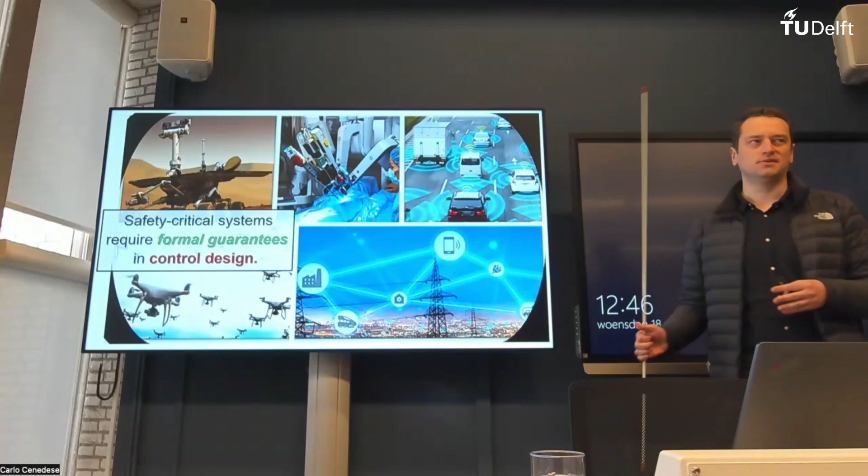The motivation, I'll try to cut it short since we're a little short on time. Basically, we need safety critical control because technological developments lead us to marvelous engineering systems that now operate in the presence of other human beings and other agents. We have to make sure some properties of the system are limited, such as the distance between cars. I do have an example we'll go through. The thing required for safety critical systems, to differentiate from classical control, is that we need formal guarantees, so we shouldn't do it in a heuristic way, or by trial and error.

What we need is to design a controller, and before implementing it, have certain guarantees. This is the content of my talk. I'll talk a little about the foundations of control barrier functions, why we actually use them, why they're nice and easy, and then how we can certify certain functions as control barrier functions — this will basically be backup constructions. Then how we can robustify them. This is a model-based approach, so the model and the real plant don't really match. How can we improve the resilience? I'm going to briefly talk about input-to-state safety in that sense. Throughout the talk I will use a safe car-following example.

So we talk about safety and guaranteeing safety. Now we need to define what it is — this definition will carry through to the end of the talk. We have a system running in continuous time, a set of initial conditions, and some sets that I don't want to be in. I'll use phi throughout the talk to define the solution of this system given the initial condition. Safety basically means: anywhere I start in the initial set, if throughout all the trajectories I never hit the unsafe set, then I am safe. But this safety definition, as relaxed as it is, doesn't give a lot of constructive ways to design the controller.

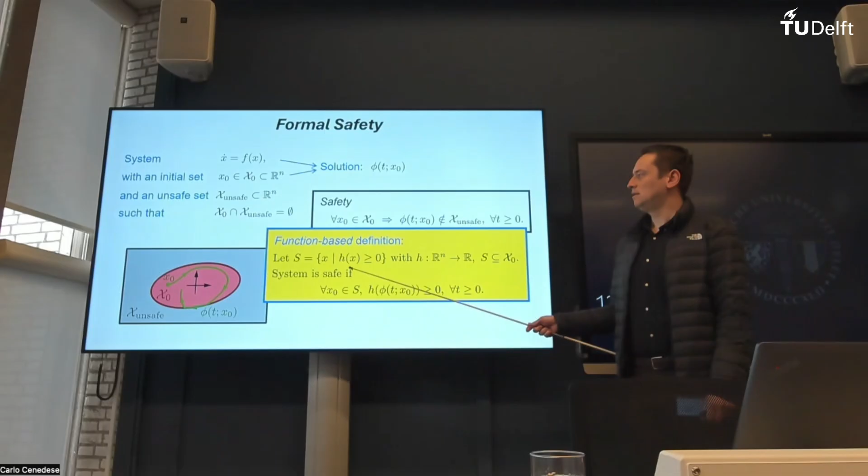This is why we actually prefer a function-based definition. It's slightly more restrictive, but we are trying to find a way to quantify safety. If I can find a set that is the zero superlevel set of this function, and this set is a subset of the initial condition, and for every initial condition, if I roll out these trajectories the function is always positive, then I am safe.

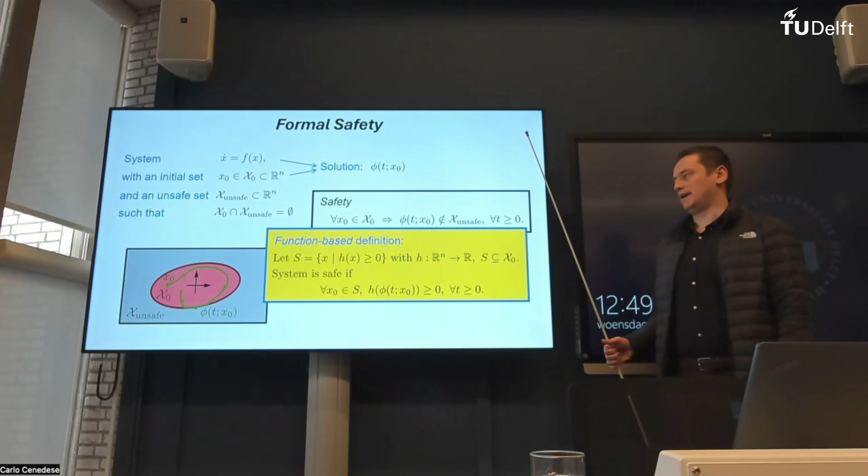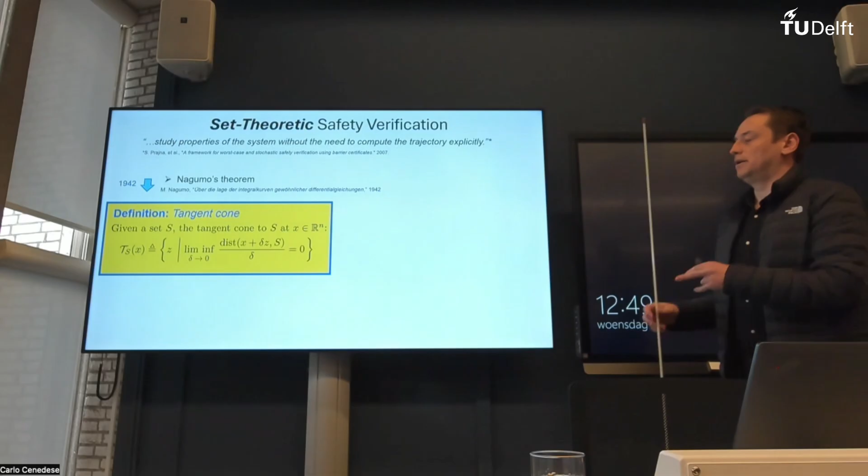So this will be the safety definition that I will rely on. How do we make sure safety is actually satisfied before implementing into a system and making a lot of experiments and heuristic or trial and error ways? It's through this set theoretic safety verification.

This basically one sentence summarizes it very well. So basically we are trying to find safety as a property of a system without really having to calculate all these trajectories for every possible initial condition. And the developments for this line of work go all the way back to Nagumo's theorem around the Second World War, where all this science and progress typically peaks throughout the world, unfortunately. But Nagumo basically found a very tight way to identify safety for a nonlinear system.

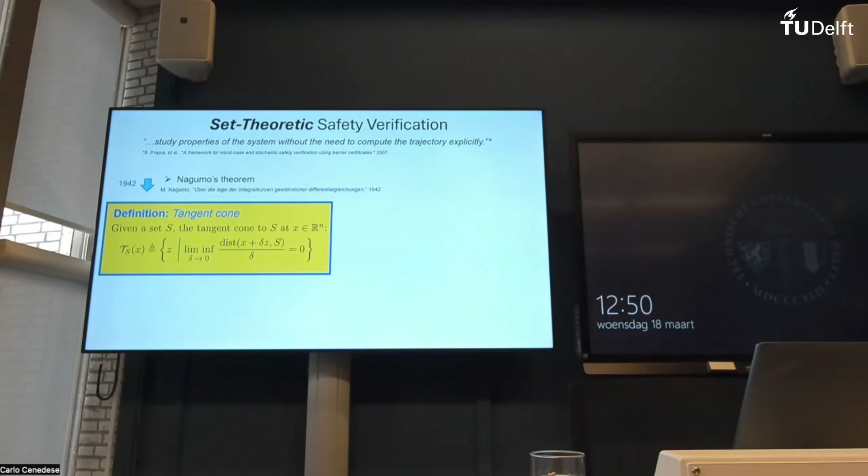It relies on this idea of tangent cones, or somehow I think some people call it contingent cones. The tangent cones are basically, at a point, the set of directions where if I go infinitesimally in that direction, I will still be in that same set. So this is basically what it says.

It's a fancy definition, but I'm not going to use this definition at all. Nagumo basically binds this definition to safety. And what I mean by tightness is he actually uses if and only if to bind this, so it goes both ways, which is pretty important. If my model at every point in this set falls into the tangent cone, then I do have safety.

This function that I use to define the set, if it's Lipschitz or smooth, then this tangent cone can be seen as a subset of this condition that I can use to calculate another set. This is basically the generalized gradient of this set. And for the smooth case, I can use the gradients to calculate the half space. But this is actually a kind of necessary condition, not a sufficient condition to give me the tangent cone.

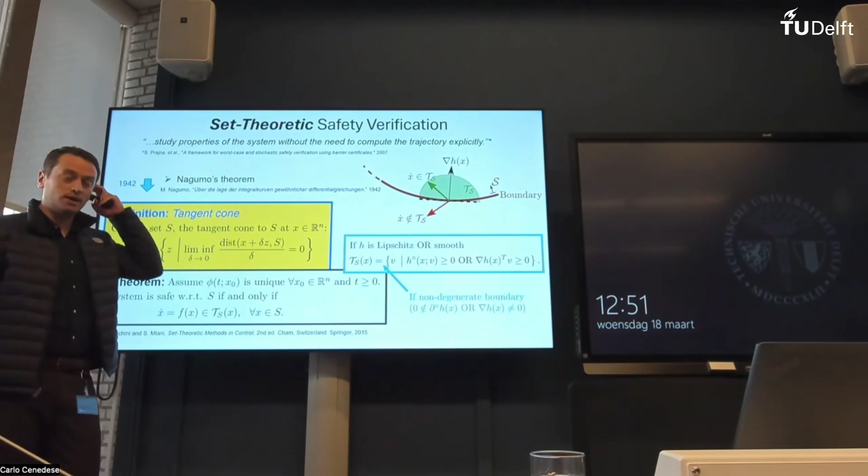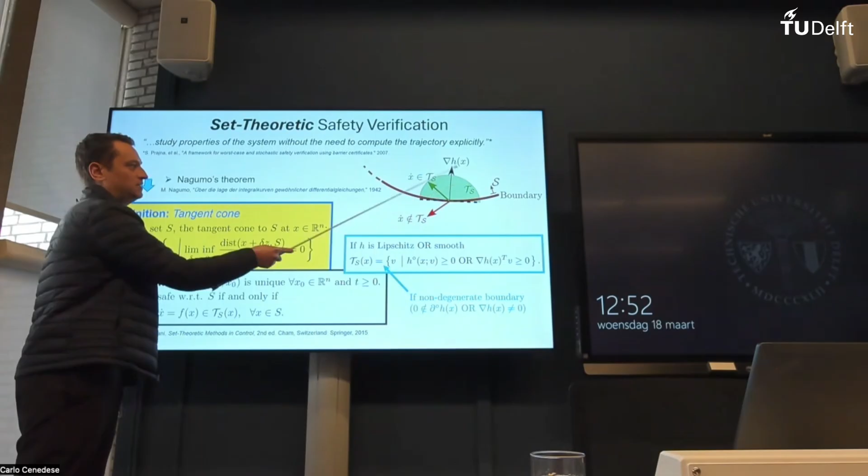If I have some non-degenerate boundary condition basically everywhere on the boundary, that means if my function is smooth and its gradient doesn't really disappear anywhere, or in the generalized case, if zero is not part of the set, then this becomes equivalent. So this kind of half space now becomes my tangent cone, and I can use this to basically define safety critical controllers. This is basically kind of what is lying underneath.

From here, we kind of jump to control barrier functions, because the tangent cone condition only gives us something to work on at the boundary, but we don't really like this because we are trying to design a controller. And if a condition tells you nothing until you hit a boundary, that's not very practical. So what you want is a condition that can also be extended toward the set itself, so maybe gradually you can approach the boundary and stop somewhere on it.

And this is where control barrier functions come into the picture. It's kind of inspired by Lyapunov functions, where we try to find this positive definite function. And by upper limiting the time progress of that positive definite function, we make sure trajectories converge all the way exponentially to the origin.

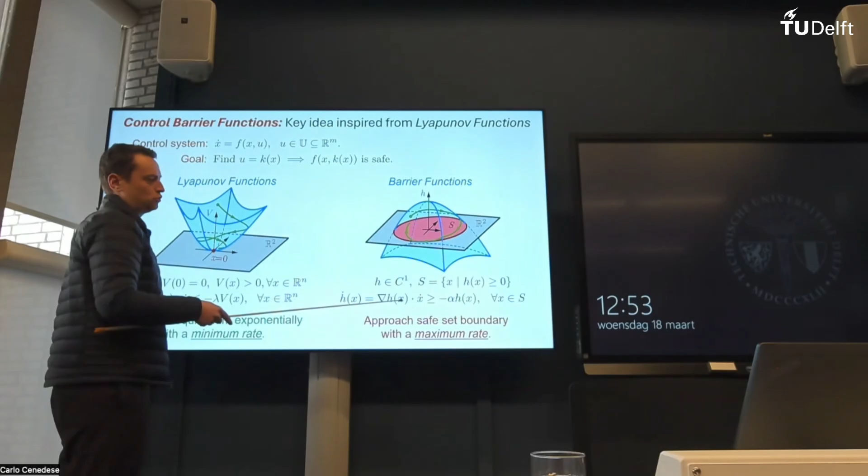Similarly, in the barrier function, you can think of that function kind of flipped and pulled a little bit above so that you create the set. Now, instead of upper bounding, you lower bound the time derivative of this function along all the trajectories, so that you can approach the set boundary, but exactly on the boundary this becomes zero, so you cannot leave. This is a very basic condition I can use to design the controller.

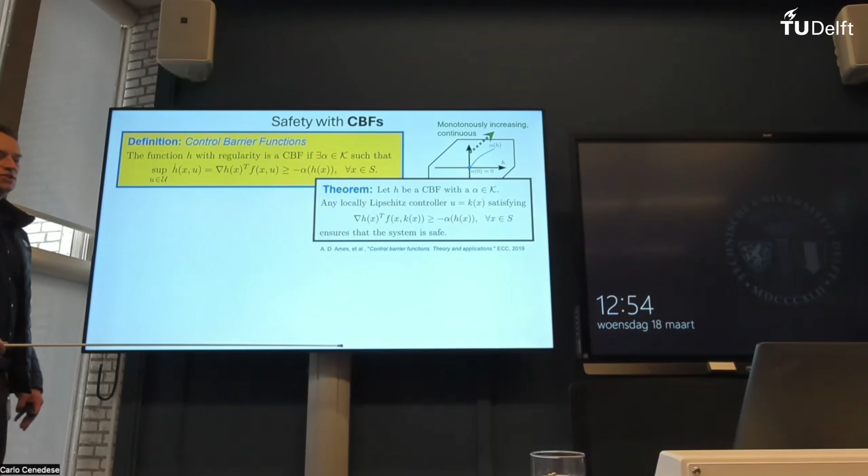This is basically the theoretical progress of this method. So we do find a way to define what a function is, whether a control barrier function or not. It relies on finding a class kappa function that can lower bound the time derivative of this function along the trajectory. A class kappa function is just basically a generalized version of a linear function. It's continuous, its argument is zero, it is zero as well, and it is monotonically increasing.

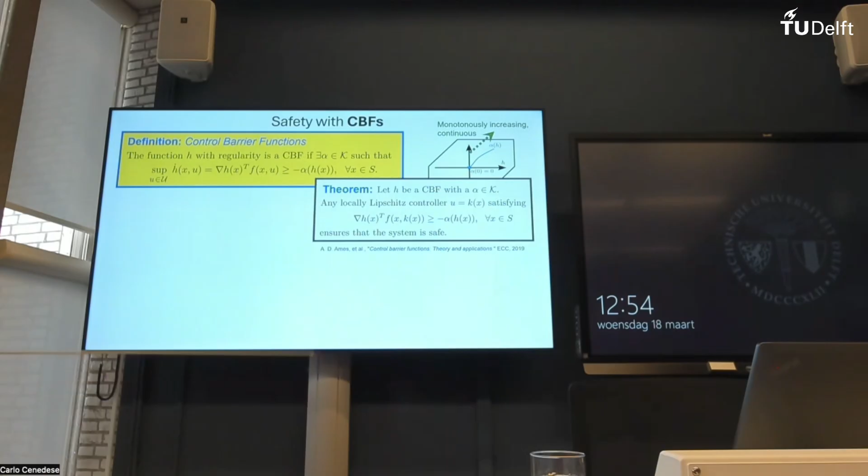And the theorem tells me that if there is a control barrier function for this state, for this system, then any locally Lipschitz continuous controller that satisfies this condition is going to keep me safe.

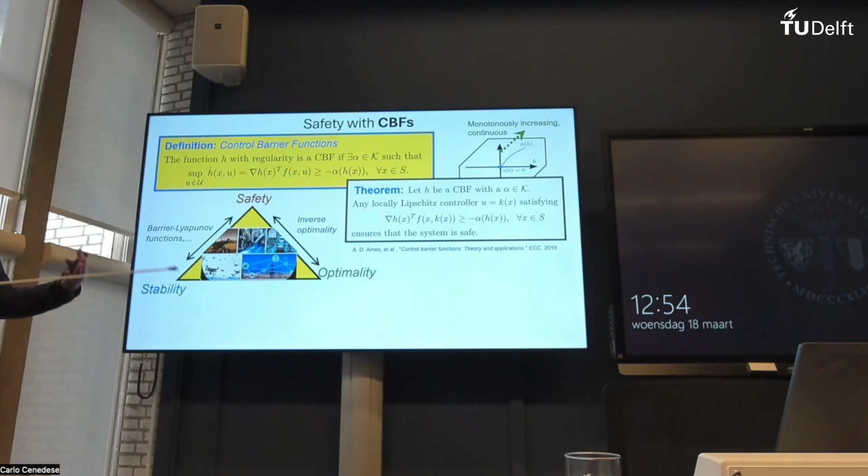So this basically deals with the safety part of this problem, but I think in modern engineering systems, we actually want to deal with all the other things as well, such as stability and optimality.

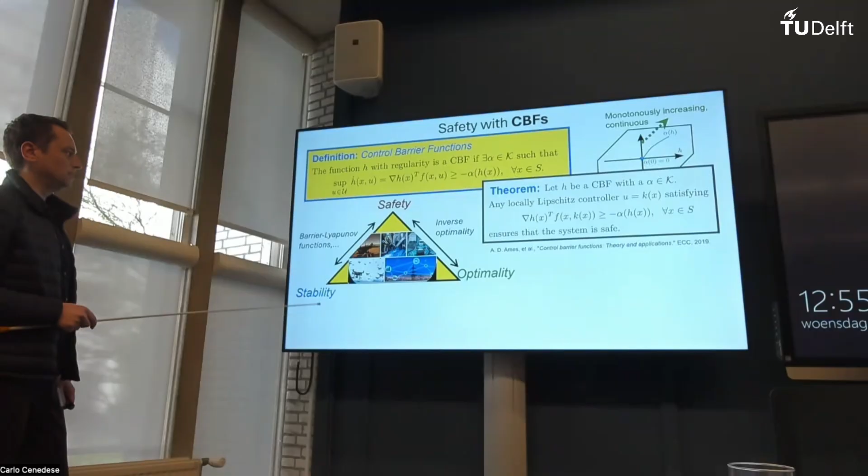Recently, there are some works threading the difference between these three edges of this triangle, such as the construction of Barrier-Lyapunov functions. And recently, Miroslav Krstić had a paper about inverse optimality, trying to find a way to get safety but also be more optimal.

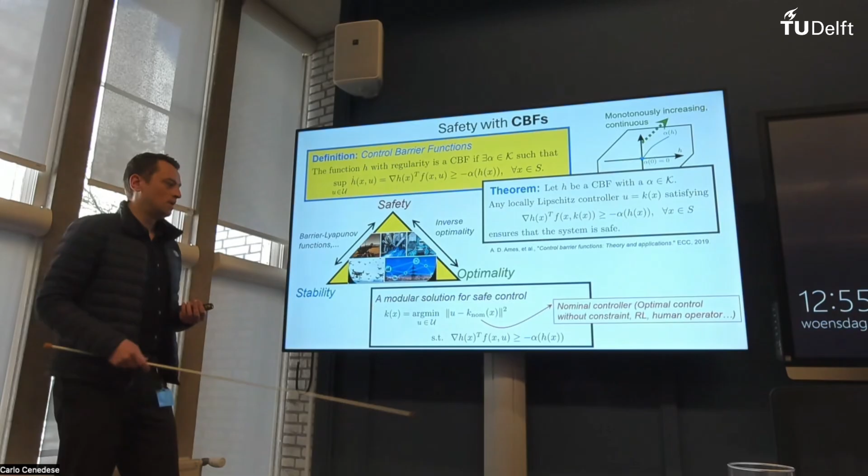But in this talk, I will talk about one particular type of controller that I can design using control barrier functions. It's called a safety filter because it's modular, very simple, and popular for its flexibility. Basically, it takes whatever controller you have—it can be another optimal controller that doesn't consider constraints, it can be RL, or it can even be a human operator.

I will show you some results based on that. Basically, what you need to make sure is that the outcome of this controller satisfies the control barrier function condition.

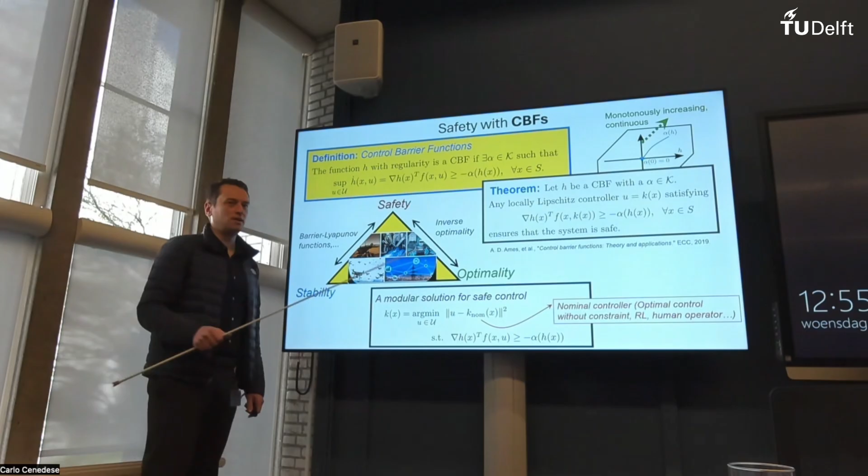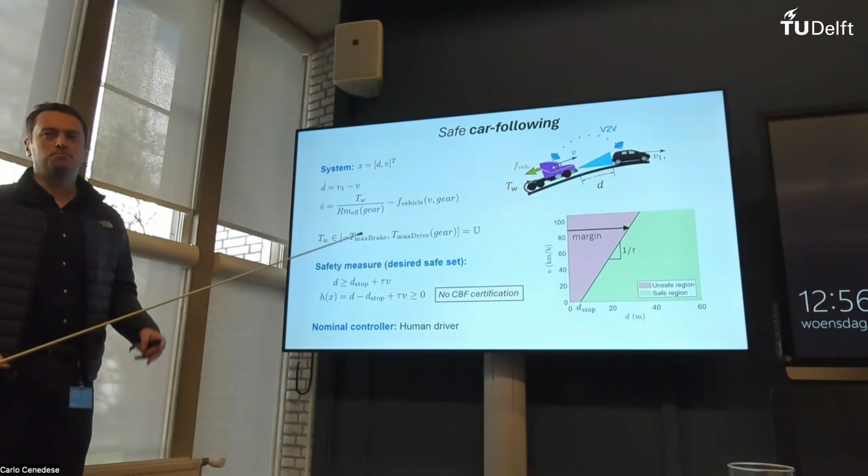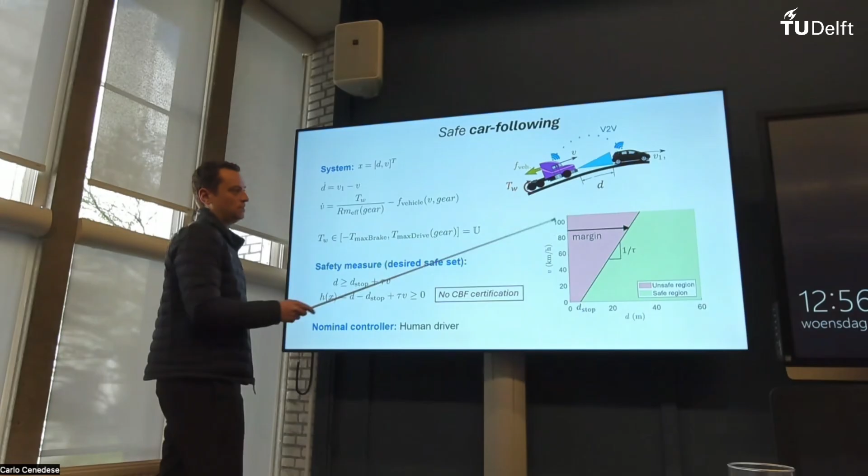As I said, I will use the car as the example because it's very intuitive and simple. I'm going to design a controller to control the gas and brake pedal for this car based on the information I'm receiving about the other vehicle—the distance and speeds are here. Basically, I just don't want to hit the other car.

I still want to add some certain margin to my safety measure. There are some practical reasons, not really that important. But basically, the idea is I want to always be in the green side of this state space, and this is obviously always going to be positive for the headway distance anyway.

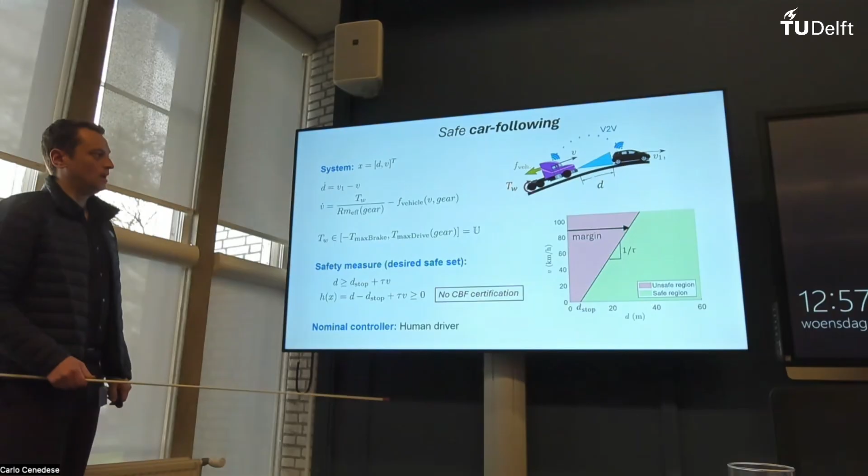The trick here is, based on this construction, I do have a certain function, but for now I'm not checking whether it's a control barrier function or not. Let's see what happens. The nominal controller I'm going to take as a human driver. So again, I'm not dealing with the optimality and stability of things, but focusing on the safety. Let's see.

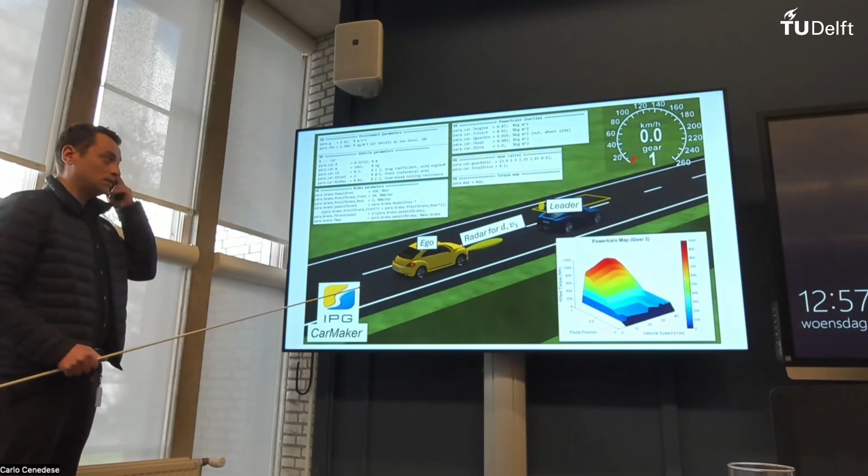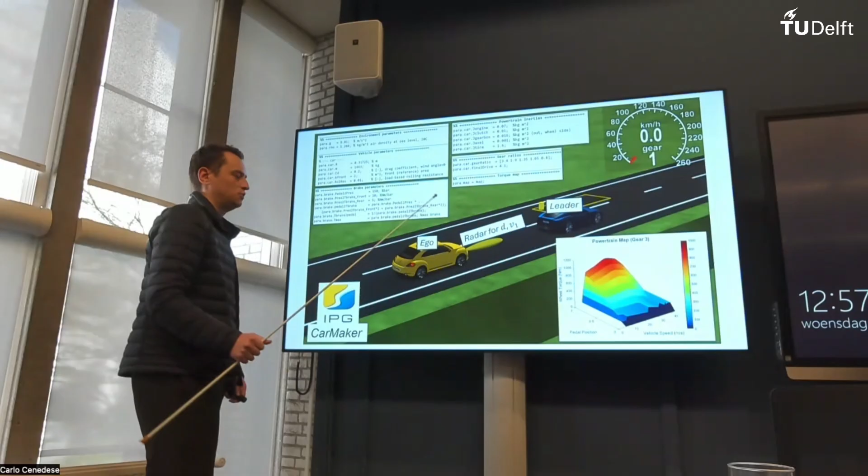For initial results, I used a high-fidelity simulator called CarMaker. It's pretty nice—you can get all the parameters for your car so you can get a precise model. You kind of need to hack the car a little bit by trying to get the gear maps and the brake maps, etc. But in the end, it is doable, and this is what I did.

So first, I'm going to give you the results for the human driver. There's no safety filter here at all. This guy is just not really minding his business, not paying too much attention to the road. This is a CarMaker model—I don't really know what's underneath running.

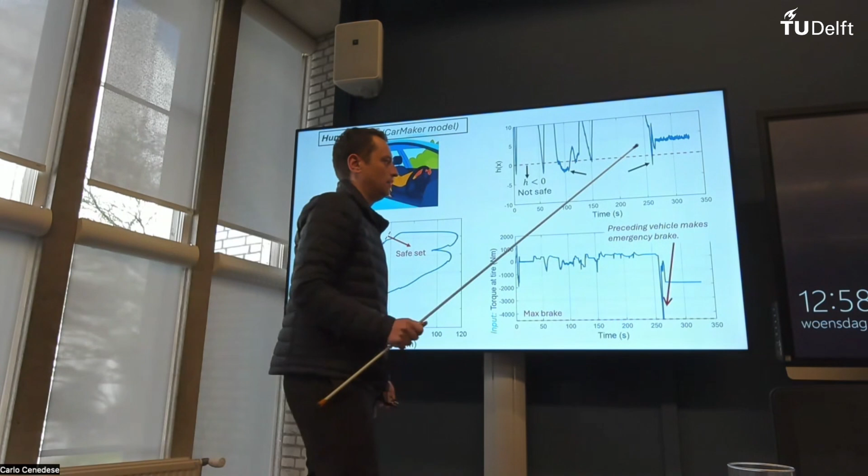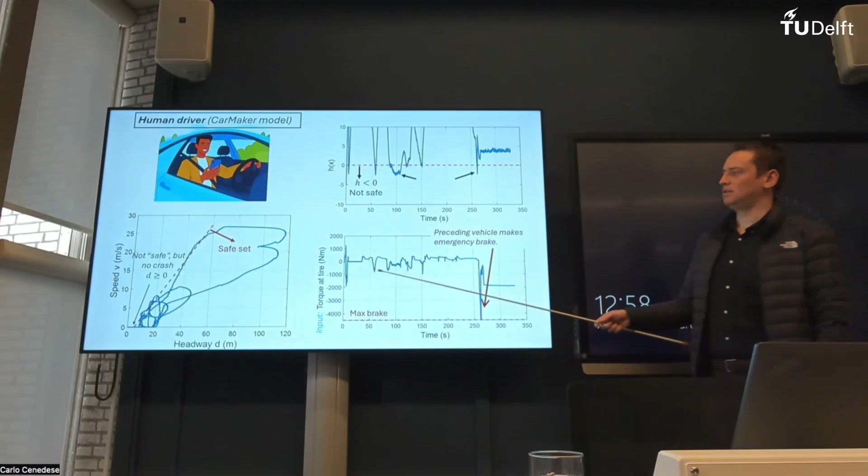As you can see, there are some instances where the safety is violated—it is the safety the way that I define it. It's important because it actually never hits the other car; the headway never becomes less than zero. But that's not important enough—we are after some formal guarantees that this function will never be negative.

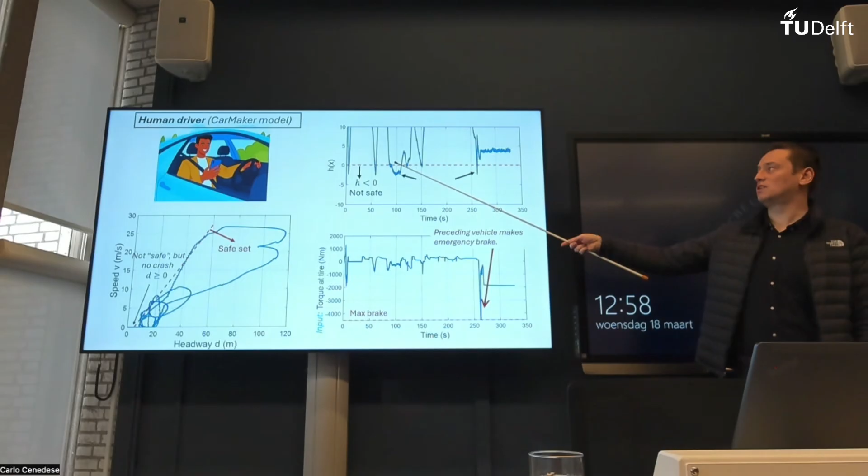If we put the safety filter on top of it, then we actually get it. It's pretty neat. And this is another very important plot that I want to show you.

This is basically whatever my controller calculates. This is important because so far I haven't talked about this maximum brake. As you can see, it is kind of going within the maximum until maximum brake anyway, so it's not a problem for now. I got the safety, I got the maximum brake here, and this controller runs within the input boundaries anyway.

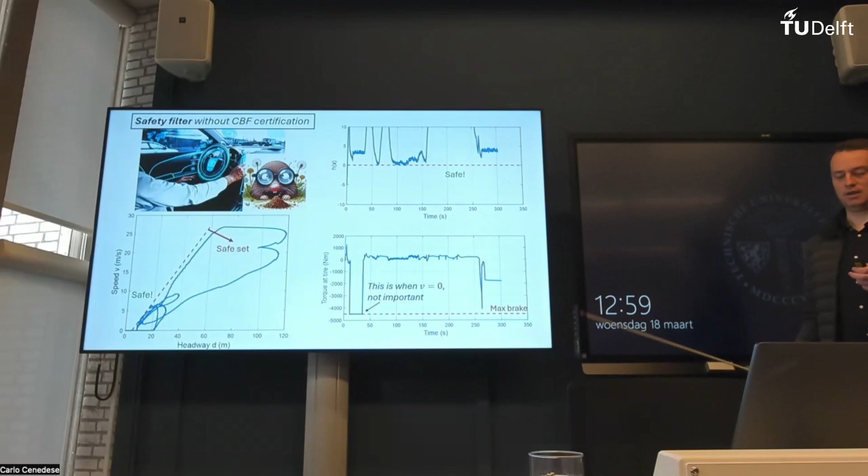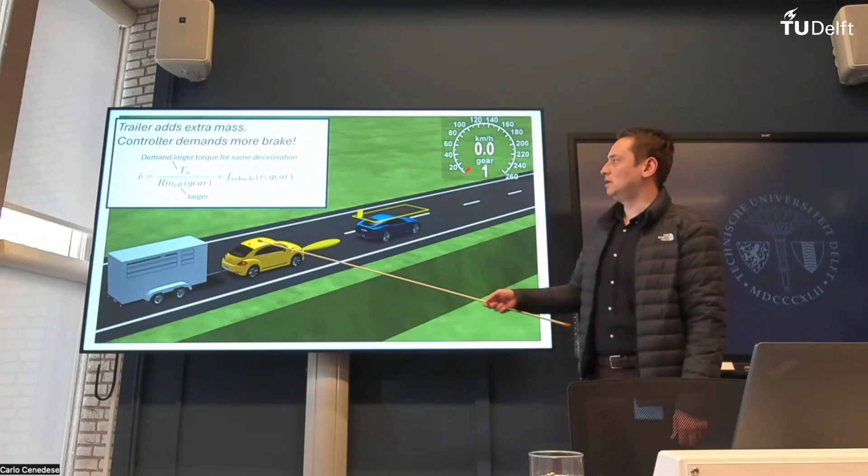But then what if we actually try to push this controller a little bit more? The easiest way for me was to add this trailer, because if your controller demands a similar deceleration, now you need a larger braking torque to realize that because of the increased mass. The idea is pretty simple—if you do that, you're going to see that mostly you are still fine.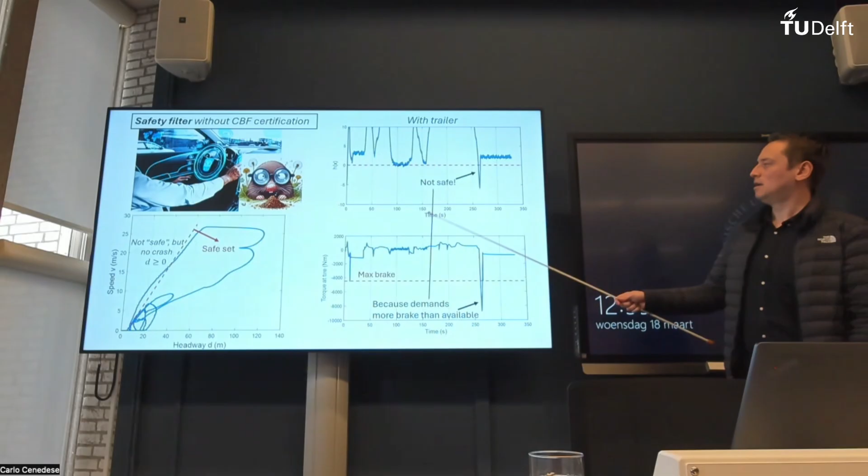But towards the end, basically, this was a certain speed profile where the leader is making a huge brake towards the end. You see that you're no longer safe just because the controller demands more than what your car gives. It is because this function doesn't have a certification.

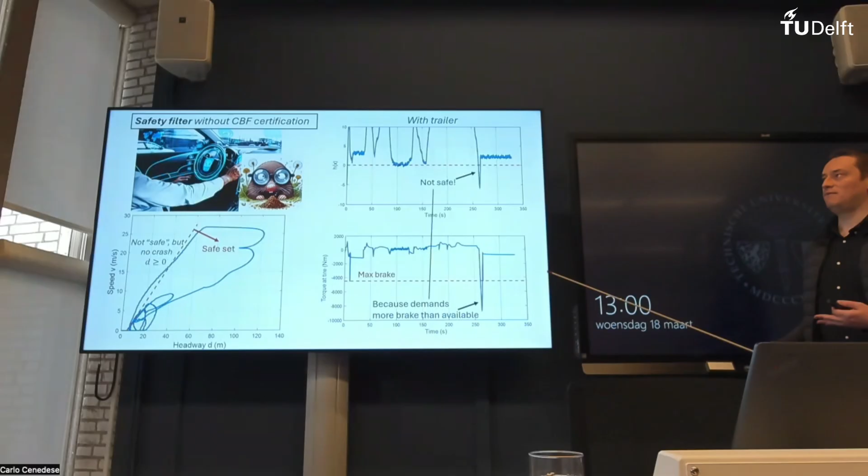And this is pretty much the Achilles heel of the whole idea of control barrier functions. The main criticism is how can we make sure that, well, if you know a function that is a control barrier function, it's pretty easy—you just construct this control.

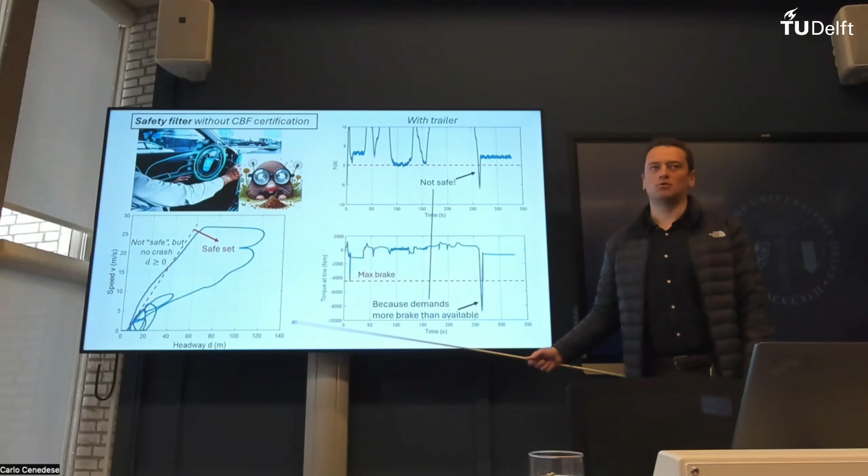But how can you actually make sure that a function is a control barrier function? This goes back to the discussion of control invariance, as I'm sure some of you at least know. This type of discussion for the MPC, what I'm talking about is recursive feasibility, basically, right? Control invariance set research goes way back, I would say 30, 40, 50 years.

The idea here is now you have a control—I want some guarantee about the feasibility, whether this set can actually be made safe within what is given to me. So if I can get this guarantee of control invariance, then I may find a way to construct a control barrier function. So we are kind of taking one step backward, getting some guarantees of the control invariance set or constructing this control invariant set.

As I said, it's very popular, a very common problem. People are trying to solve this problem using methods that are mostly numerical, I would say, like backward set pruning. Basically, you start with a set and check its boundaries. And if a point in the boundary doesn't really give you safety, then you kind of get off that point and get another set. It's a very iterative way.

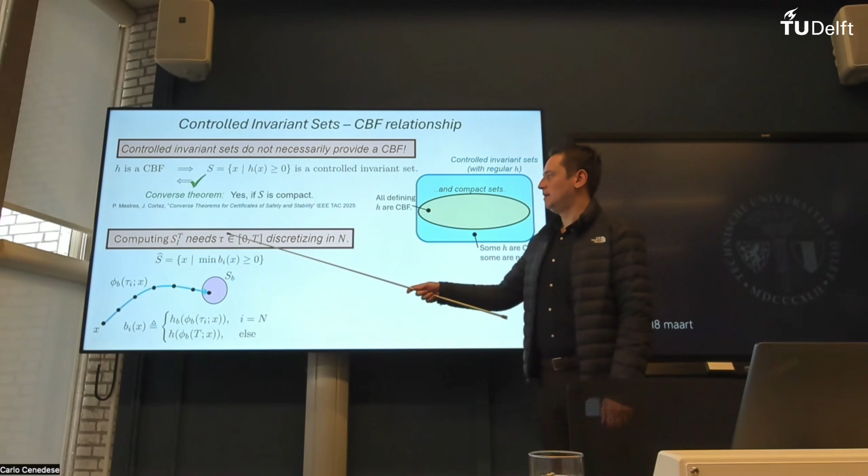Another problem with the backup set is the continuity of time. We need to discretize it, and in the implementation, this is what we did basically. The whole idea at the end of the day is we can merge these two things together.

We come up with a way to show that using the backup trajectories, you can design a control barrier function. So now we have a way to guarantee the feasibility of the safety filter as well. And if we implement this to the system, we got the premise: we do have the safety, and the controller doesn't need to violate to get the safety.

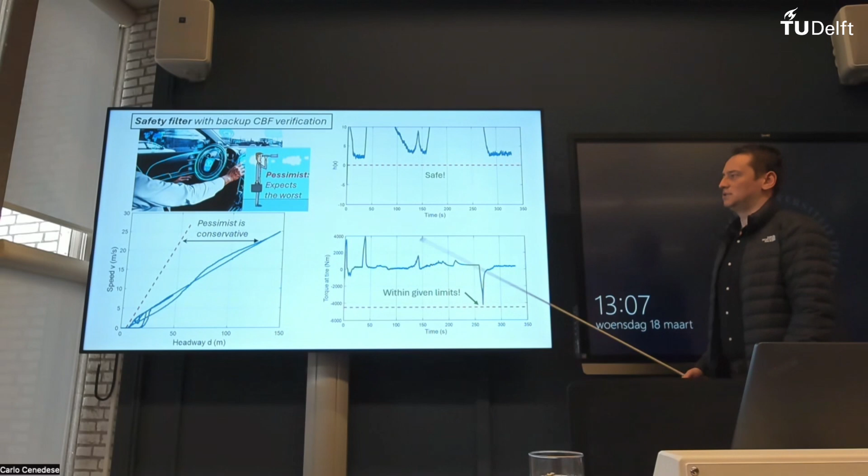But the problem is now you are rolling out certain trajectories in the simulation, and you have other agents in your system. You have to have an idea about what the other people or agents are going to do, at least within some certain window. If you always expect the worst from them, you will get a very conservative result. If you exactly know what they're going to do, then you get a really good result, but how can you know that?

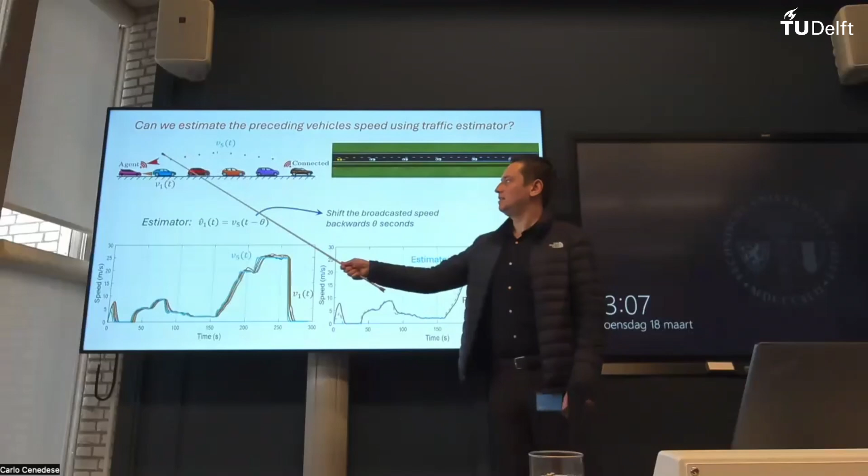This brings into question whether we can actually have a nice estimate of what this car in front of me is going to do within like 5-6 seconds. There are traffic models that give me such estimates, and I believe the simplest and most intuitive one is this one. It relies on connectivity, which is becoming another hot topic actually.

So what is going on here is if we have some certain way to get the GPS data of the first car, then we can shift it a little bit in time to estimate what the blue car is going to do. So if we get a brake for the first car, then this brake actually progresses all the way to the blue car in time.

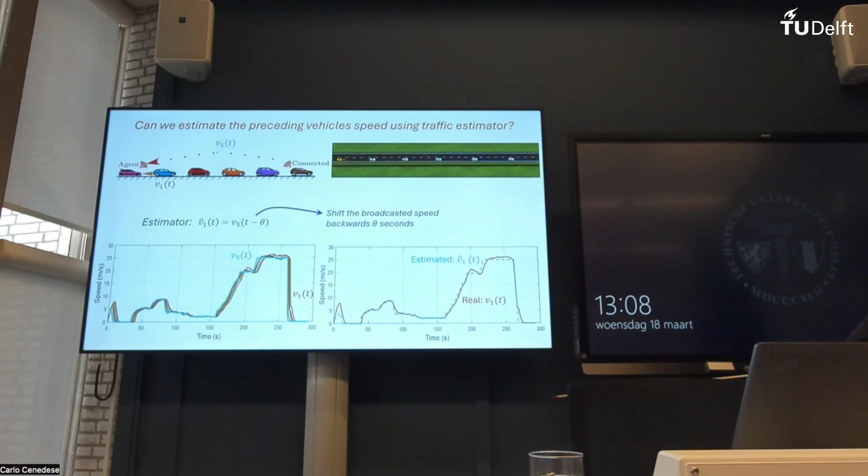And this estimation is actually given here. It's pretty decent. And this is through the simulator, by the way, this is not MATLAB. So all these cars run some certain driver models to themselves. I don't really know what they are.

I am just designating what this car is going to do, and basically by putting a couple of seconds backward, I have an estimate of what this car is going to do. So if I implement that, I do get a pretty decent result too.

All right, so this is pretty much the first half. In the second half, I'll talk a little bit about the robustness, but I want to stop a little bit if you have any other questions. I realize maybe I'm going a little bit too fast.

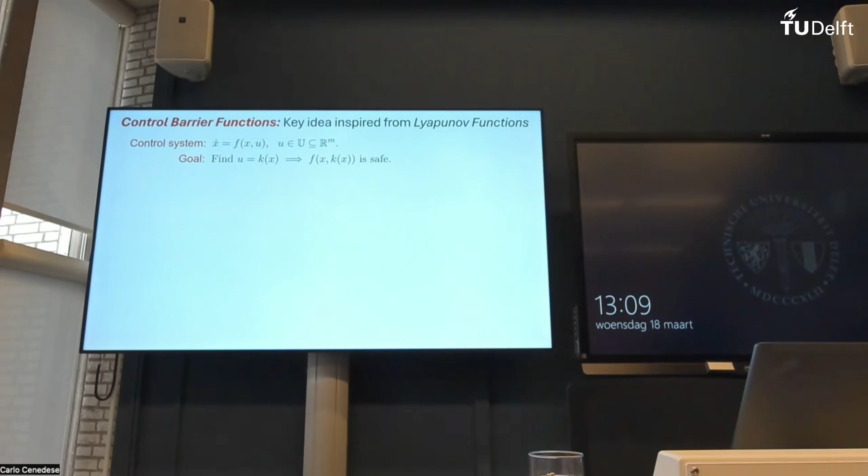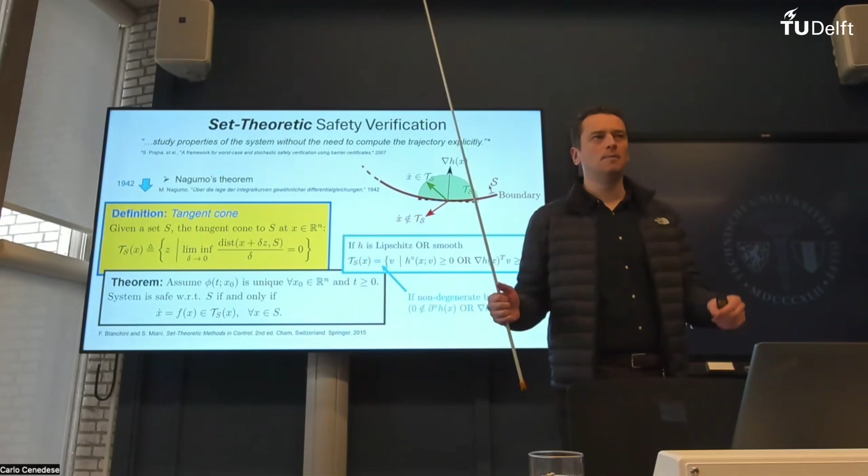I'm sure there are ways to specify what this distance means, but it's not very important. So the thing is, this tangent cone is actually, if you're in the interior of the set, it is everywhere. If you're outside, no point. So it basically is very important on the boundary. And to characterize the boundary, we have basically these things.

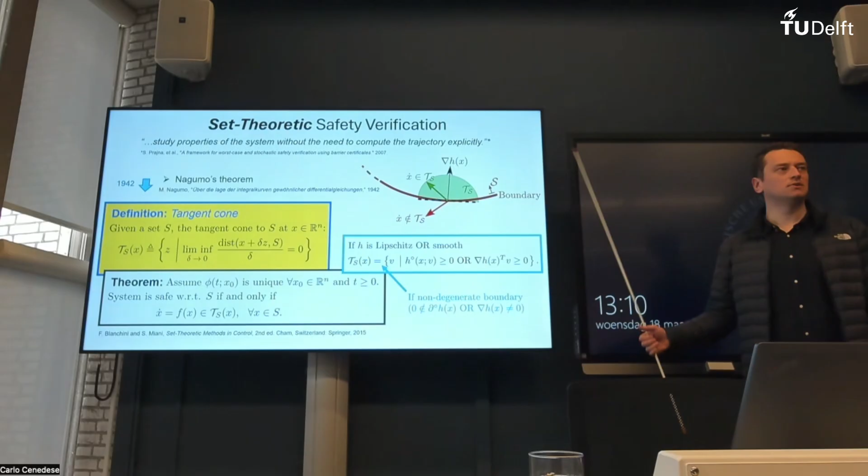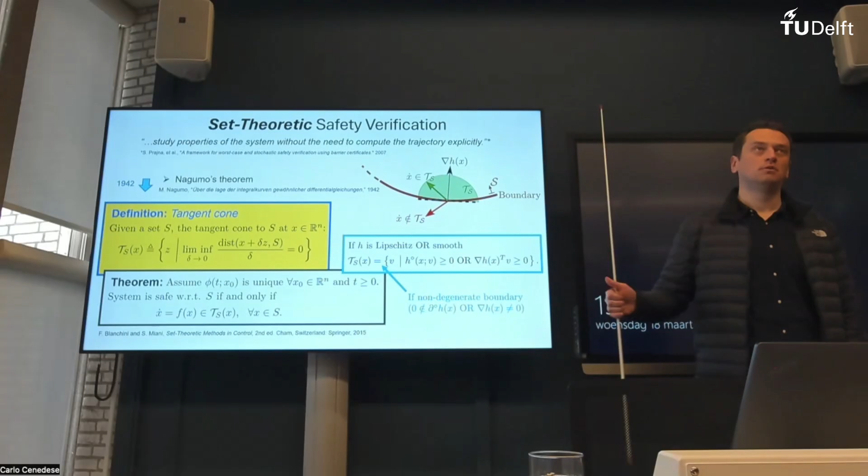Interesting, yeah, I'll think about it. You had a question too.

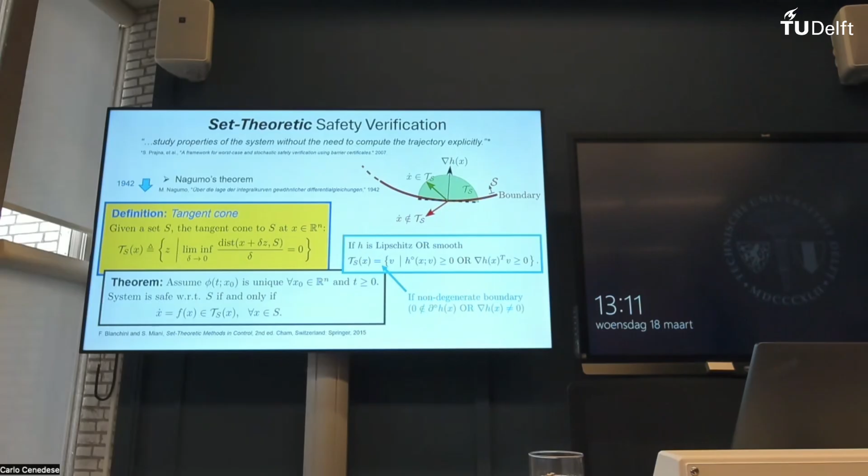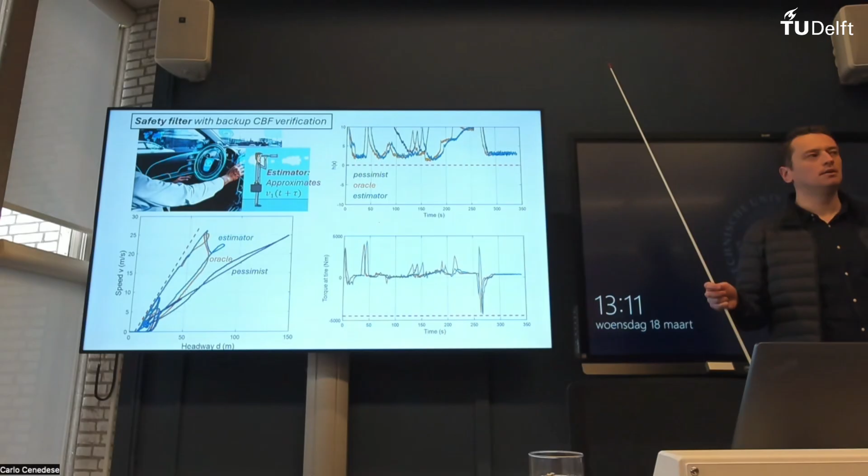For the case where you use the estimator at the end, do you still have all of the guarantees? Because with the Oracle you have a guarantee since it's perfect. Worst case is obviously guaranteed because it's worst case. The answer to your question is no, because I'm not robustifying my methods based on whatever error this estimator may give. But there may be ways to do it, and this is where I'll come to. I'll discuss robustness not relying on the estimate error, but based on whatever. It can be more generalized, but I think you'll get a better idea. So actually, there's some certain resilience inherent to the model, to the method itself, so that even with some estimation errors, I still have what I want.

You have an equivalence condition for the barrier function when X is compact. What kind of H satisfies this? For example, does linear not satisfy it, or what kind does?

No, a linear function necessarily defines a half space, so linear functions do not work. It has to be something like a polynomial that you can use.

I'm skipping a lot of stuff here, but there are extensions of this work that also work for half space type formulations as well. This is just if it's compact, you get the result directly, you don't have to make any changes. But if it's not the case, you can make some changes and still get this result.

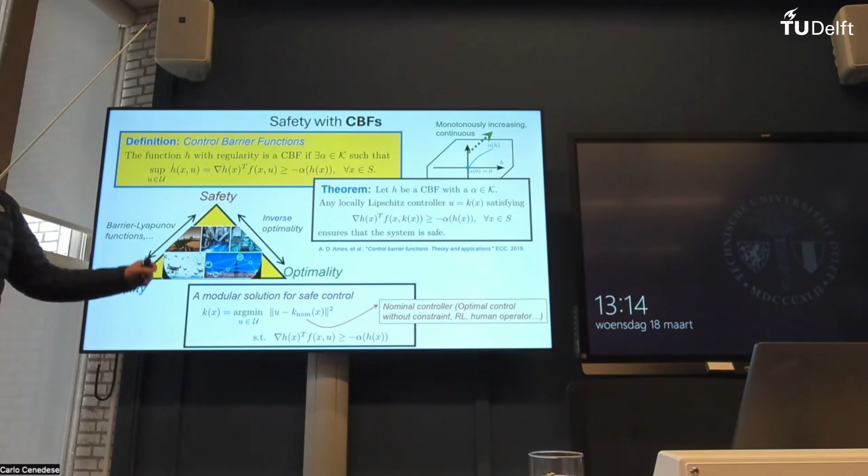That's a good question, about solving this quadratic programming problem. Particularly for this example, I didn't show it to you, but we have a closed form solution for this problem. It's basically a min switch controller, this whole thing becomes. But for a general setting, you're right, it's a QP you need to solve, or maybe it's a QP or maybe not, but you still need to be able to solve that.

For implementation and the computational talk, there are some people trying to find approximations, but I don't pay too much attention to that direction. Whatever you work in the continuous time state, as long as your model is accurate enough to capture what is going on in the system in a continuous time domain, then the theoretical guarantees should still hold.

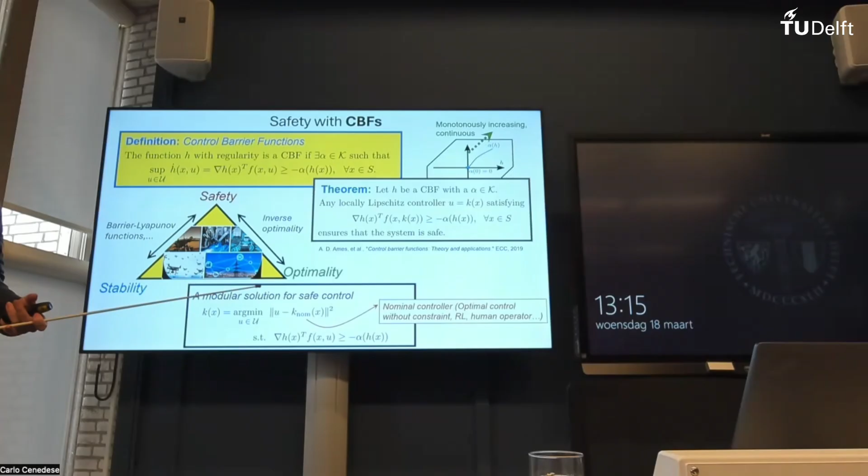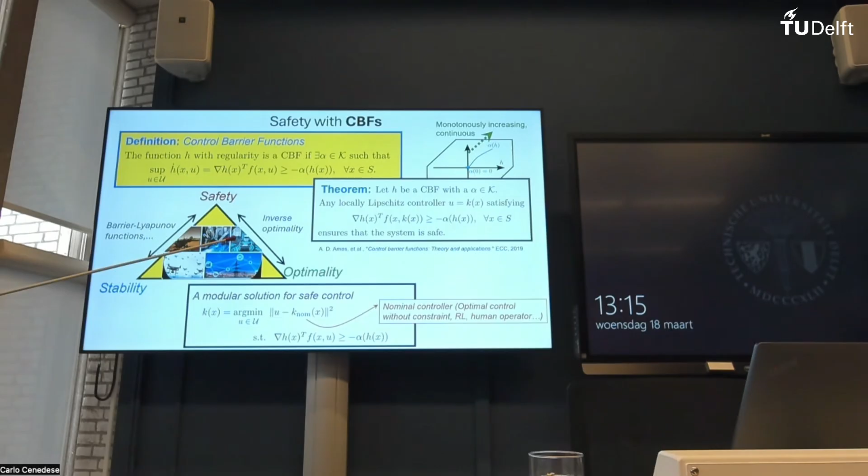I would say probably for robotics this approach is a little bit more common. There are methods like the Lagrangians, the Newtons, etc. They are going to give you continuous time models. So I feel like people use this for those types of things.

But anyway, so let's go to the robustness.

One of the things that my personal experience gave me is that as you go up in scale in the cars, the problem gets more and more complicated. So far we were talking about passenger vehicles, for example, it was somehow easier to model and you actually have a really accurate model representing the system. You can check it using the experiments. When we implement the same controller to the truck, we start having some problems.

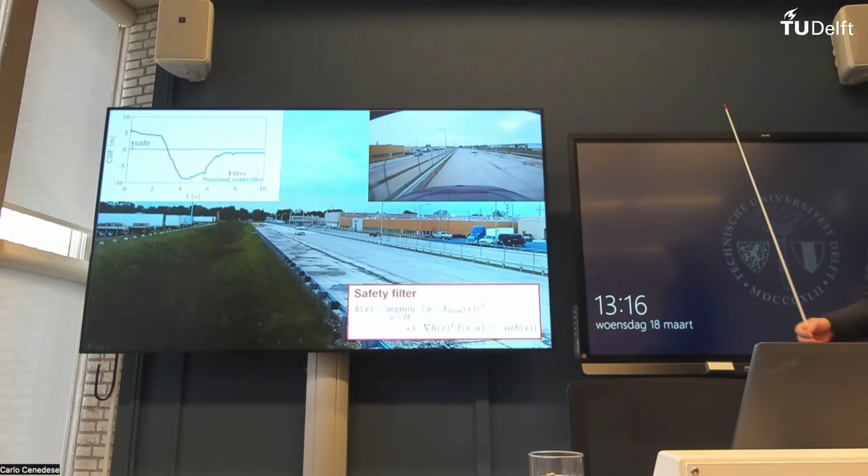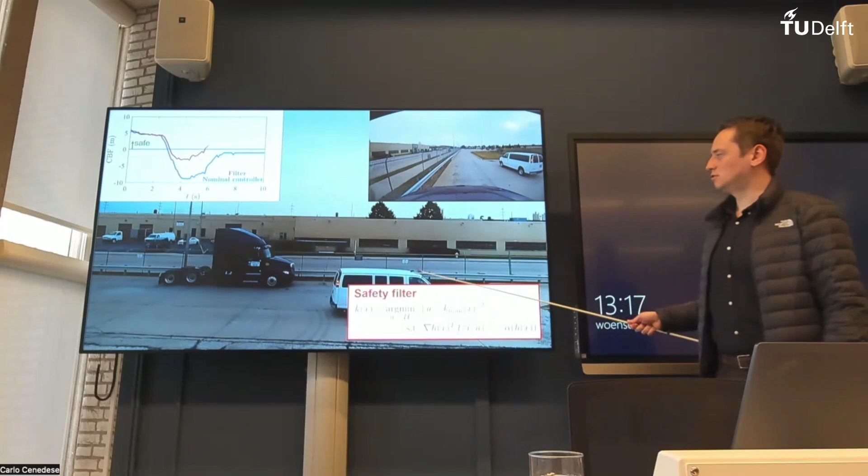But then obviously we are doing PhDs in academia, we need to push the controller all the way, right? What can this controller do if there's actually an emergency brake in front? So these cars are talking to each other through these devices, and based on that, I decide whether to brake or not.

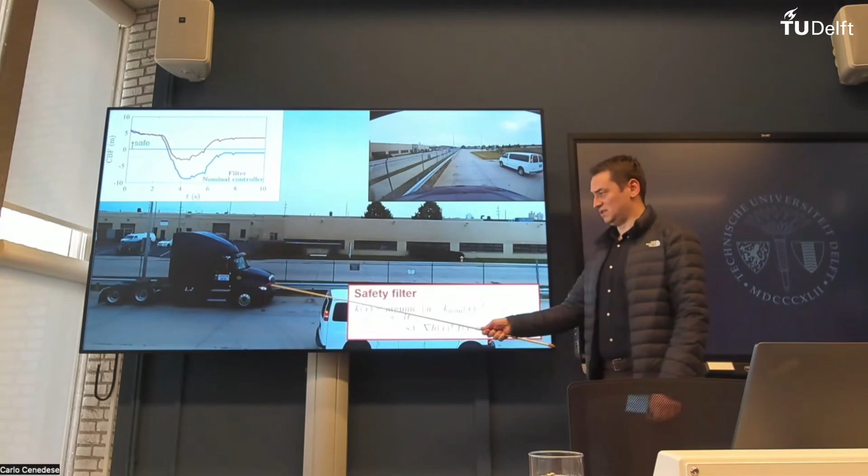So the thing is, in the emergency brake situation, I don't get the physical collision, but the formal guarantee does not hold. And that is not surprising because of this theoretical model that assumes there's an ideal powertrain and brake, which is somehow a reliable assumption for passenger vehicles, but it is not the case for trucks.

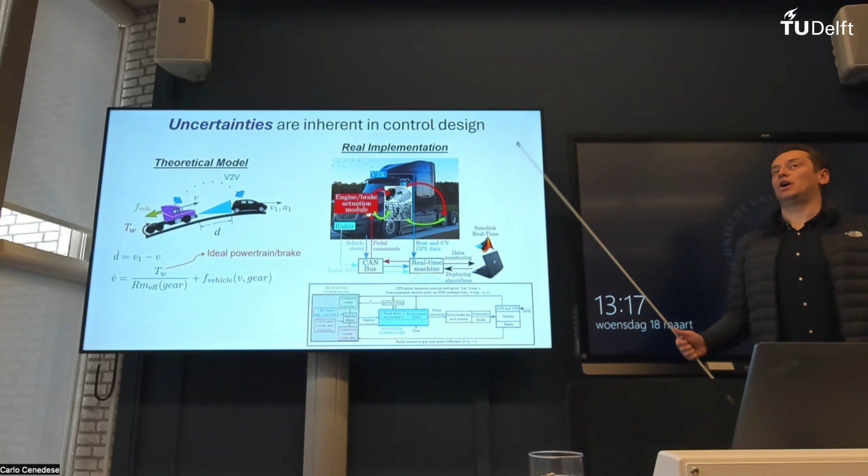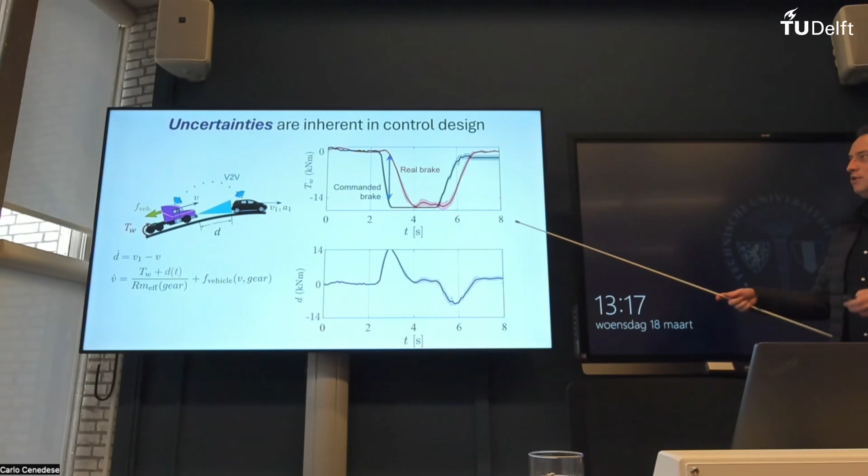Because in order to get a very high braking torque that is required to stop the truck, you need to use air brake. Now that you have some certain, almost up to 1 second of reaction when you make the command, it's going to come a little bit later. And this system is very hard to model. It's very complicated. There's some safety checks and etc.

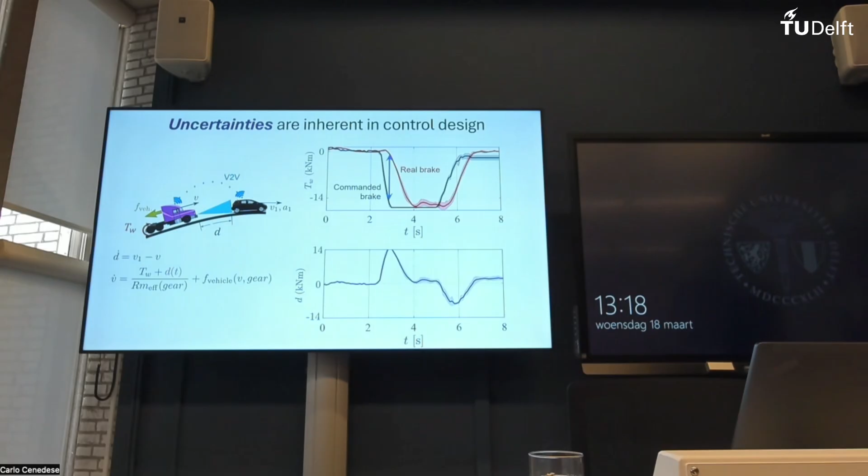So rather than increasing the fidelity of the model, what if we just treat that as a disturbance and design our controller according to that?

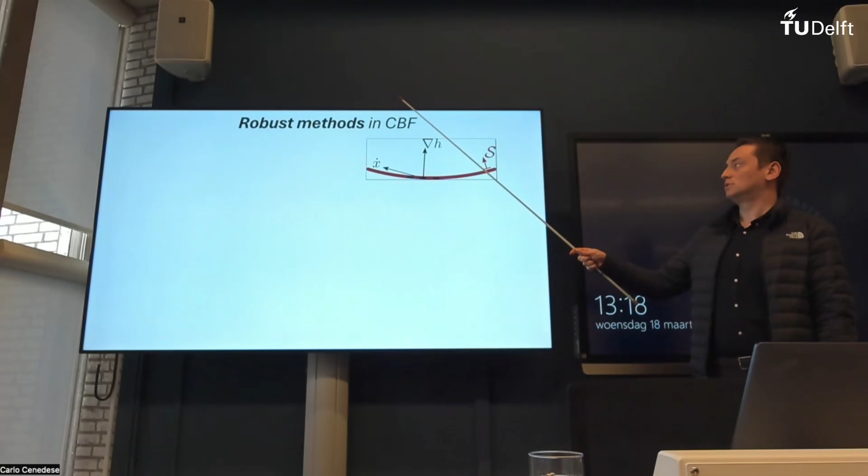So there are robust methods in control barrier functions. It's an ever-growing literature, I would say. Every year you'll see maybe 10, 15 papers. The idea here is instead of just making sure the controller is going to keep the system safe based on just a single vector, now we have a range of vectors, right?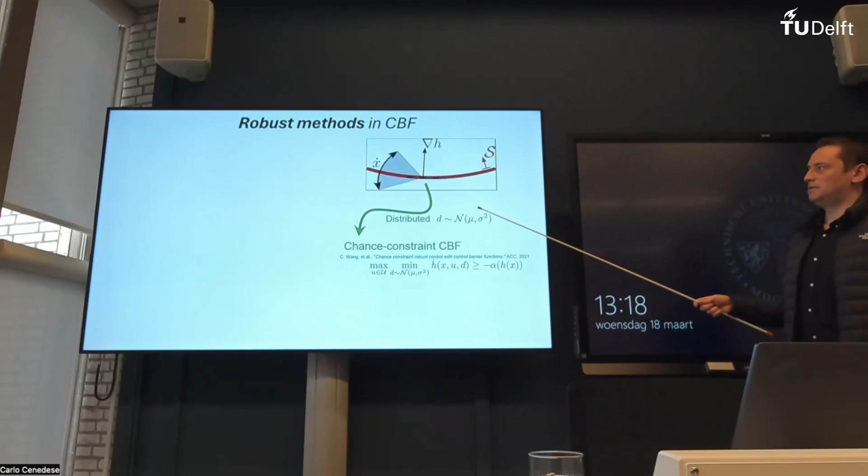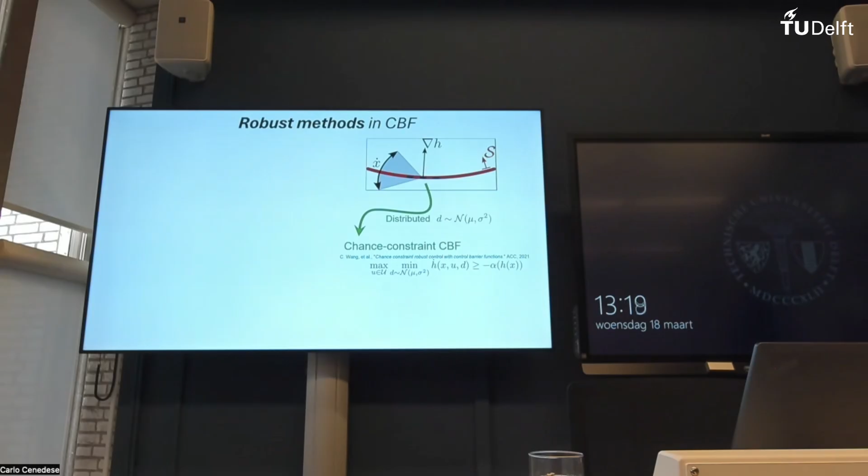If the nature of the uncertainty is distributed, then the control barrier function constraint can be changed towards a chance constraint. Then it's going to give you a probabilistic safety result. So you're going to be safe to 1 minus epsilon chance.

If you have deterministic bounds, basically, if you can have a very clear idea about how disturbance is going to affect your system in the worst case scenario, then you can approach this problem in two different ways. One is the robust control barrier function. Basically, you want to kill the effect of disturbance with your controller. And that's one way. It's very popular, very intuitive.

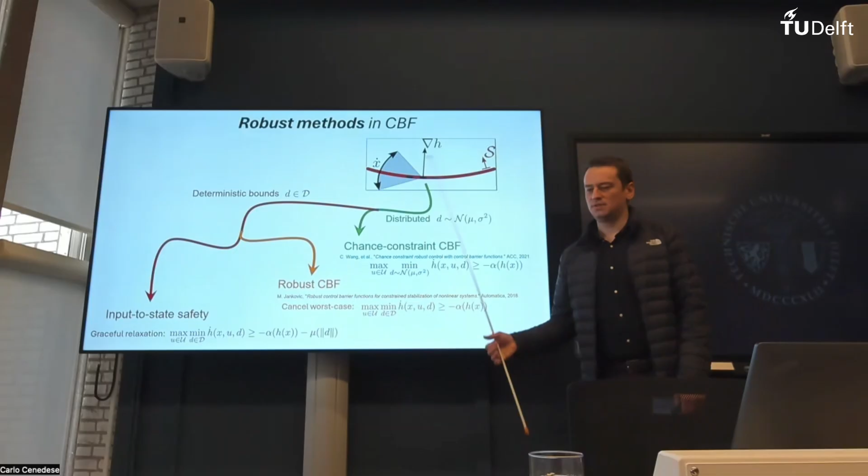The other way that I spend a little bit more time on, I would say, is: okay, there's a disturbance. If you can actually kill the disturbance using your controller, then do it. But what if your disturbance is also a function of your input as well? Like, what if you're actually playing a game where you're also changing what the disturbance is going to act as in the future?

In that case, the best thing we can hope for is a graceful relaxation of formal guarantees. What we mean by that is, now instead of getting a 0 on the right-hand side, can we find a lower bound that is going to give me, as I said, a safety relaxation?

And that relaxation is going to scale with how much disturbance there is. But this is very much like a classical control approach, where I'm trying to characterize how much this disturbance is going to affect the outcome of my plans.

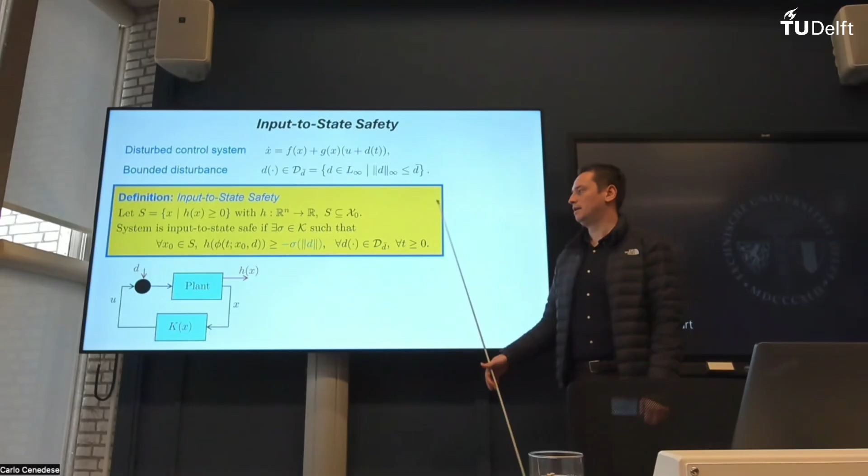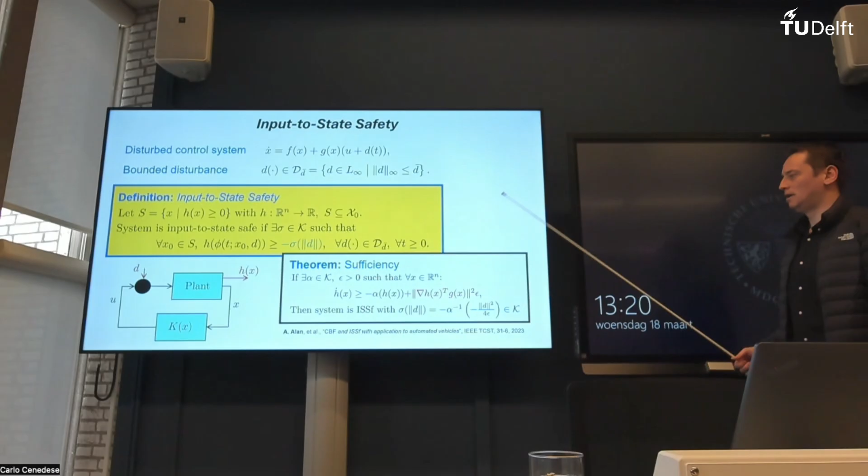And I can do that. There are some sufficient conditions I can construct based on the control barrier function. It's not really important what it is, but basically you can calculate such a function. So this new addition term is going to give you some extra robustness to your system.

And this epsilon appears here and here as well. That means that you can actually tune it. So if you want practically zero degradation for safety, you can do so by increasing this epsilon very, very much. But in that case, you get a very, very conservative result. So there's a trade-off here to strike.

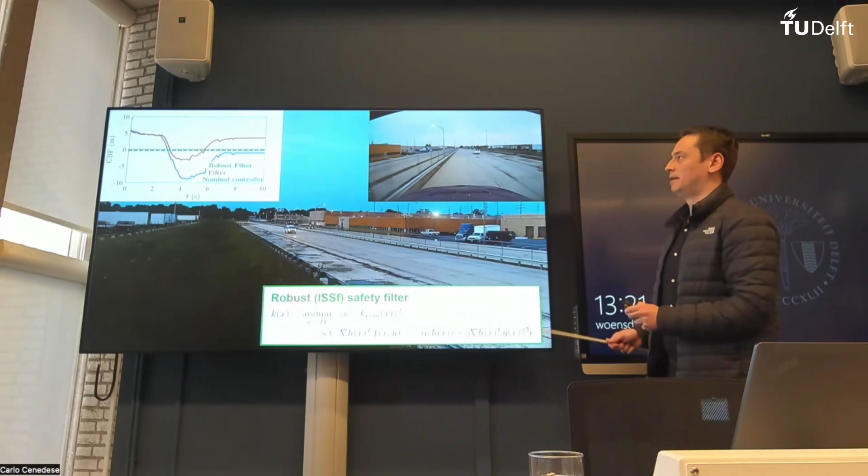In the end, this controller can be implemented. It is very simple, it's just like another line of code for this system, I think. And this is the safety degradation guarantee that I calculated. And this does work.

So input-to-state safety is very promising, I would say. There are some works that are extending this towards multi-agent systems. I think in the near future, maybe you'll hear more about this idea.

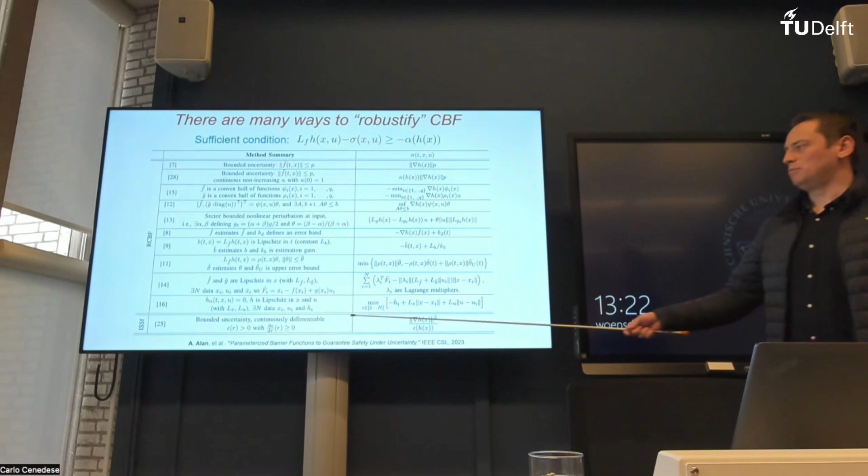But by no means is input-to-state safety the only way to robustify the system. This is from one of my papers, maybe 3 or 4 years ago. And ever since, the amount of work tripled, maybe even more. People use every way to eliminate the unnecessary conservativeness coming from robustness, like adaptive control, disturbance observers, methods that use data to learn the nature of disturbances, etc. It's a very hot topic right now. In the end, what we want to reach is an algorithm that runs reliably in the long term and safely in the presence of other agents. If we can achieve that, I believe this is an improvement. This actually ends my talk.

So I was trying to understand. If I talk about the disturbance in terms of the probability we have given, the air brake, the delay in the air brake is the disturbance, right? Or not? And I'm trying to understand, if you have a delay in the air brake, then how do you compensate with some other inputs in terms of a practical example? Because you say the air brake is the last condition, like an emergency condition. So what extra input or brakes do you add when you are calculating the control inputs?

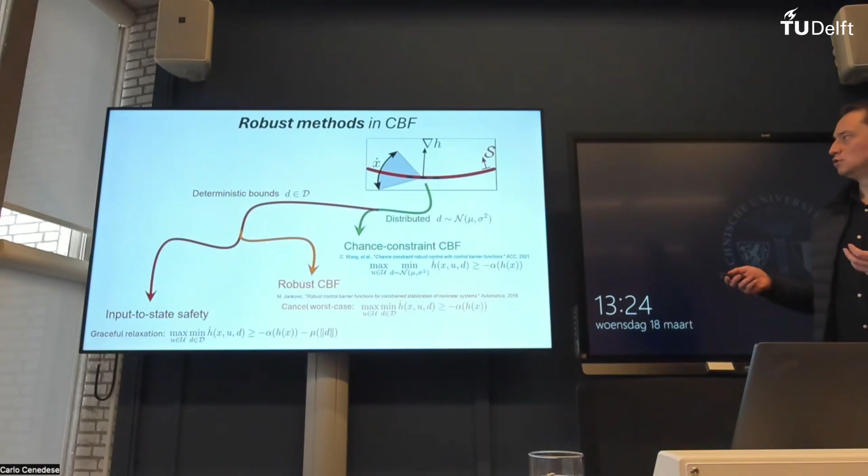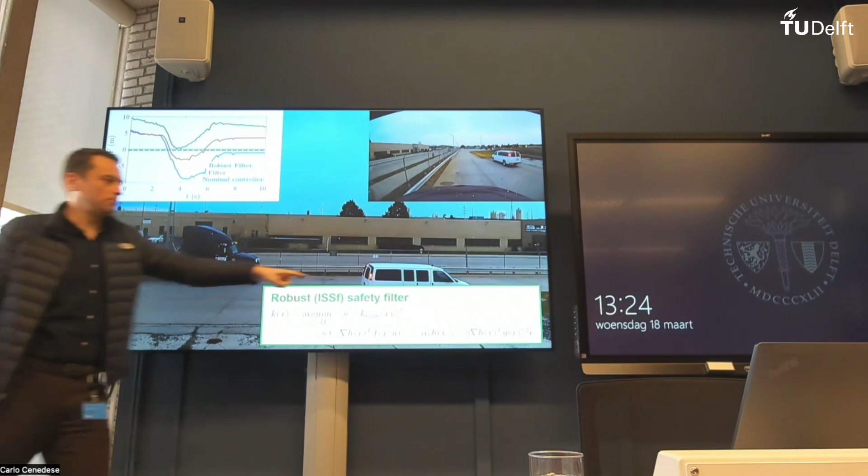You are implicitly considering that in the calculations. So that actually is going to be here. You pay a price, right? And the price you're paying is shown here. So this extra term is going to give me some sort of robustness. This is the price I'm paying, because if I don't add that, I don't have to follow the car from that much distance. But as soon as I put that, it's kind of a proactive way of saying, wait, if I brake, it is going to kick in one second later, so what if I put something that possibly follows the other car?

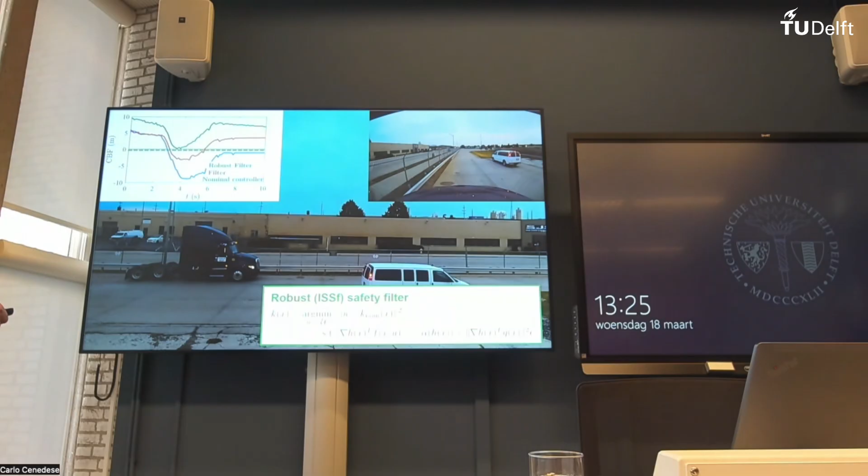Understood. So essentially it boils down to the fact that your estimation of disturbance has to be from some time before, right? So suppose there is an emergency stop, then you have to estimate that the car is stopping in this emergency situation a bit before, so that you can incorporate that a priori. Not really. This thing works as long as your disturbance is bounded.

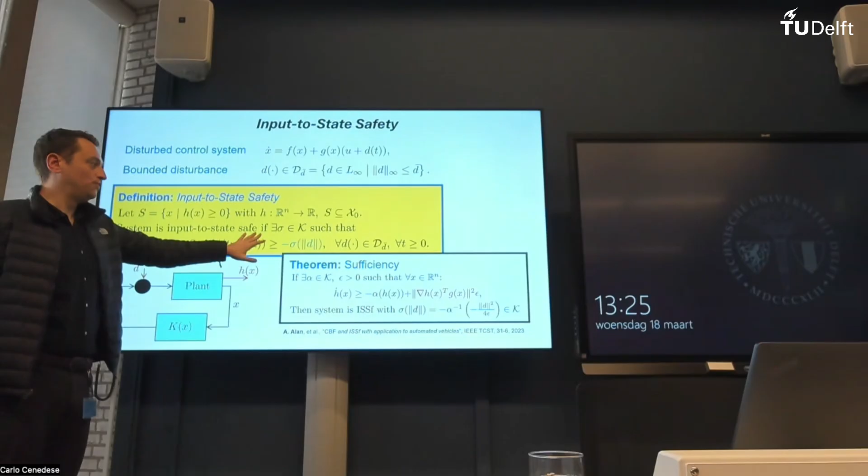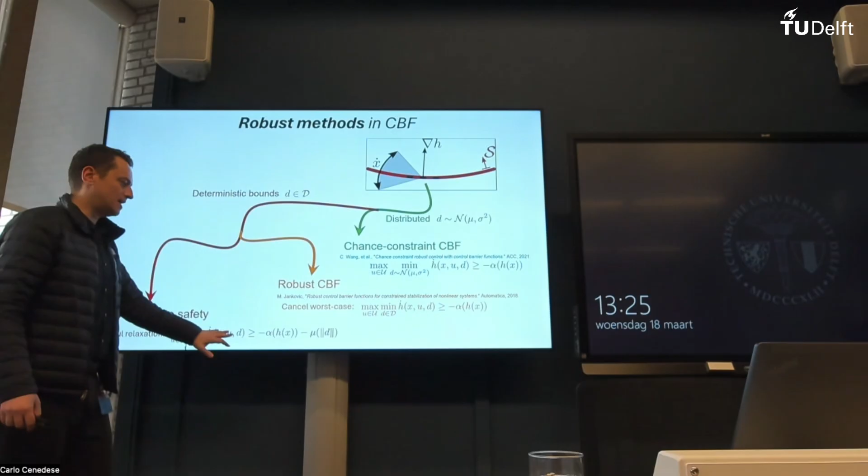As long as you have a bounded disturbance, you will get a characterization of safety degradation. It doesn't matter whether the car in front of you is going to brake or not. As long as you assume the car in front of you is going to behave in a certain window, then you do get this. But the problem is that window can change based on the way you act. This is the shortcoming of these approaches, because it assumes you can always calculate the worst case scenario and compensate for that. But ISSf basically tells you that maybe if you play the game, the other person changes, so the bounds change now. So this is more desirable, to get a relationship between how much that disturbance acts on your system and how much the outcome is going to change.

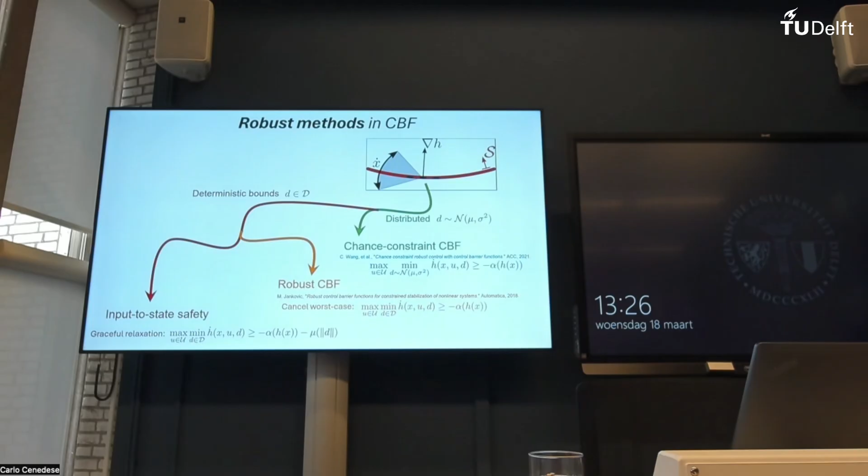Thanks for the talk, I have more of a speculative question. So with a postdoc in my group, we use barrier functions to build a fault detector. It gives you guarantees on how much time you have before you exit the safe set. When you were talking about your backup controller, I was wondering if that could be used to build a fault-tolerant controller that you switch to when you have an anomaly. I don't know if this makes any sense.

I think it does make sense. But for fault-tolerant stuff, I was more thinking about input-to-state safety, because you do have a degradation of your safety, a way to characterize it. So if a fault happens on your system, you fall back to that guarantee. But this, I haven't thought about exactly, though I believe it can be done, because this is a very flexible way of constructing something. It's very intuitive, right? You pull out something and based on what's going to happen in the future, you may change your behavior. I think it makes sense, but I need to check the details. I think we discussed this before, but I'm willing to read a paper, that would be nice. Thanks for the question.